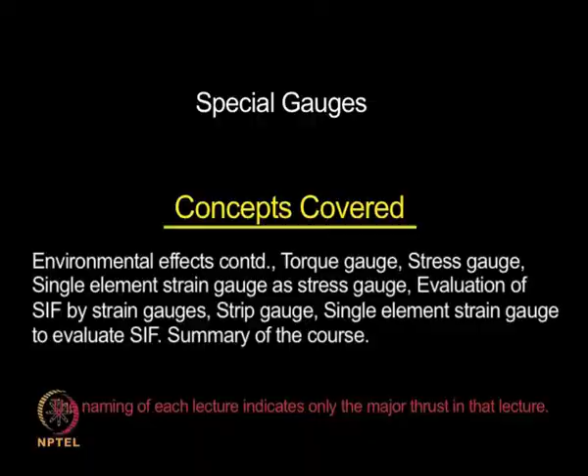We have been looking at finer aspects of strain gauge instrumentation systems. In the last class we looked at how to account for transverse sensitivity in a general case, then how to effect these corrections in the case of a T rosette, rectangular rosette, and delta rosette. Then we moved on to how to make strain measurements under hydrostatic pressure, nuclear radiation, temperature extremes, and cyclical loading, and finally we looked at environmental effects.

I said water is the elixir of life, but water is very bad for strain gauge installation. We saw that strain gauge installation needs to be protected against moisture. So, when you learn that it has to be protected against moisture...

One of the simpler approaches is to apply a thin layer of microcrystalline wax or an air drying polyurethane coating, and this is good enough for laboratory measurements where your readout time is essentially short.

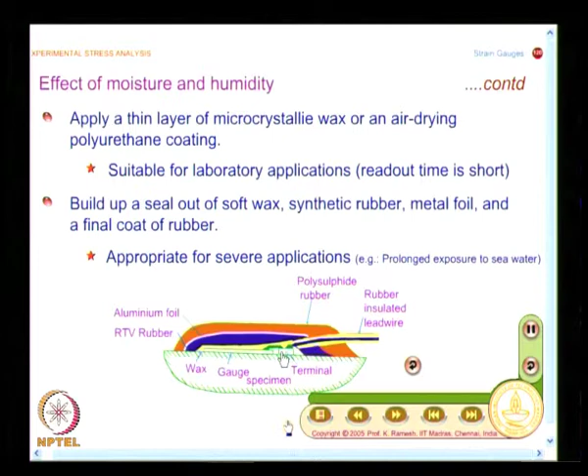I would like you to have a neat sketch of this, a figurative sketch.

So, what you essentially have is, on the specimen you have the gauge, then a coat of wax, then a coat of rubber, then aluminum foil, and a final coat of polysulfide rubber. This also you can see as an animation where you see one layer after the other.

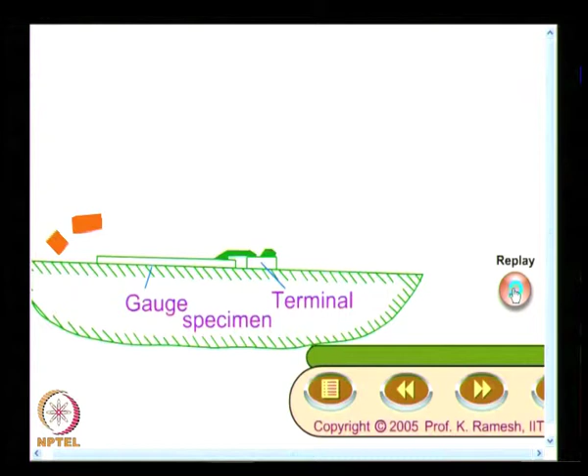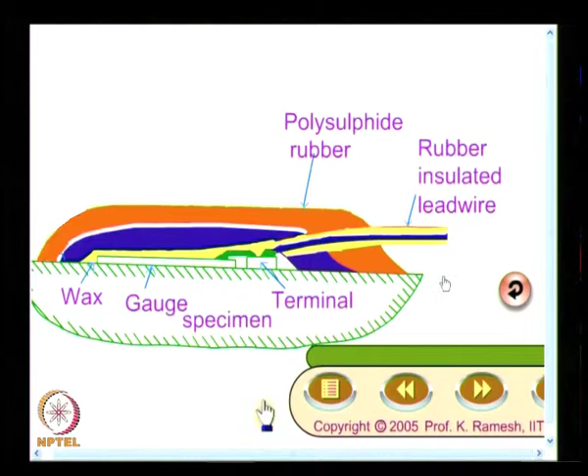Now we move on to an interesting class of special gauges. First we take up plane shear or torque gauge, and here we are going to look at a very generic arrangement. In this you have two strain gauge elements oriented at angles theta A and theta B, and you have the reference axis as x and y.

So, you have one strain gauge element measuring strain along theta equal to theta A, and another strain gauge element measuring strain along theta equal to theta B. We will develop the equation for a very generic arrangement first, then we will substitute specific values of theta A and theta B and simplify.

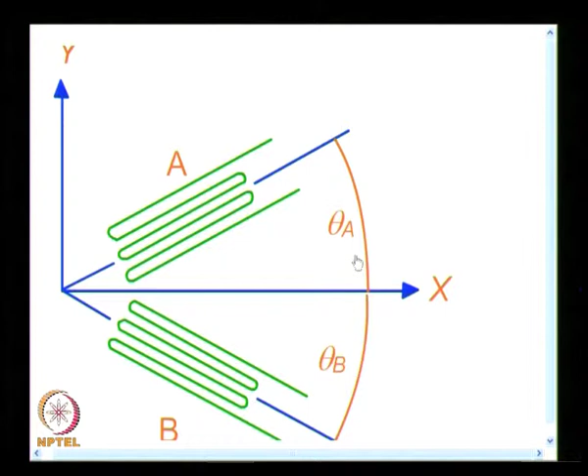In all these approaches, you need to know the strain transformation law. If you know that, analysis of strain gauge data is very simple. Here the strain transformation law is written down in terms of cos 2 theta and sin 2 theta, instead of cos square theta, sin square theta in that form.

So, when I have a strain gauge oriented at theta equal to theta a, epsilon a is given as epsilon xx plus epsilon yy divided by 2, plus epsilon xx minus epsilon yy divided by 2 into cos 2 theta a, plus gamma xy divided by sin 2 theta a.

And you simply replace theta a with theta b in the second expression. My focus is to find out the shear strain. So, from these two expressions I can solve for the shear strain gamma xy, and that is finally given as gamma xy equal to 2 into epsilon a minus epsilon b, minus epsilon xx minus epsilon yy multiplied by cos 2 theta a minus cos 2 theta b, divided by sin 2 theta a minus sin 2 theta b.

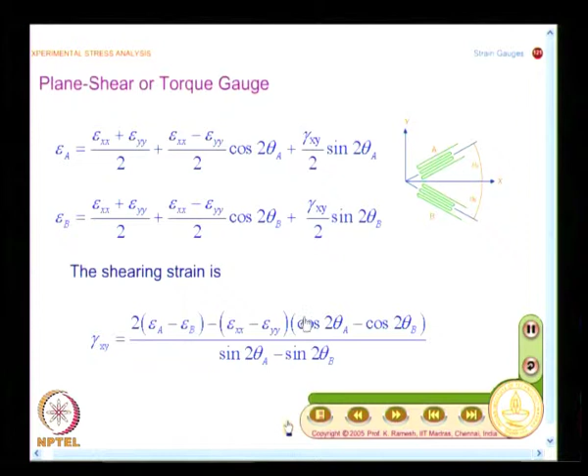What I am going to do is take the first step: make theta a equal to theta b in magnitude. If I have theta a equal to minus theta b, then cos 2 theta a minus cos 2 theta b will go to zero, so you will have only one term in the expression for gamma xy.

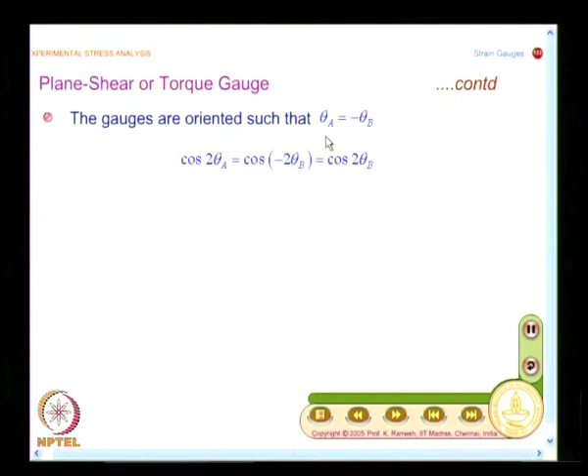So, when I have theta a equal to minus theta b, I get gamma xy as epsilon a minus epsilon b divided by sin 2 theta a.

In normal strain gauge measurements, you connect one strain gauge to a Wheatstone bridge. Only in special applications you may connect more than one strain gauge. Suppose I use a delta rosette or a rectangular rosette.

Essentially, I would connect each of the strain gauges in a rosette to separate Wheatstone bridges for strain measurement. Now here, I will connect two strain gauges which form a T rosette, and when I connect them on adjacent arms, we have already seen adjacent arms cancel each other. If the angles are oriented at theta a equal to minus theta b, then connecting two strain gauges on adjacent arms of the bridge automatically gives you epsilon a minus epsilon b.

So what you essentially get is shearing strain at the point of interest, and I can take a very special case when I keep theta a equal to 45 degrees, I get a much simpler expression.

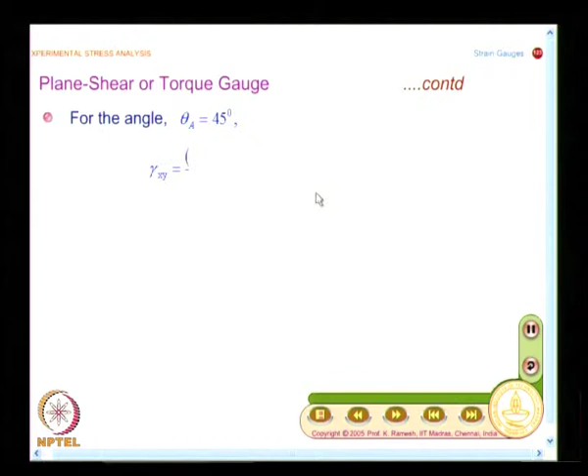That is how most of these popularly available strain gauges are oriented. So what I have is gamma xy equal to epsilon a minus epsilon b divided by 2.

So I have a T rosette and I connect the two elements of this to one Wheatstone bridge. This is a special application. Here we are not measuring state of strain at the point of interest, we are interested only in finding out shear strain, we are not interested in anything else. In such a case, you can connect elements of the rosette to appropriate arms of the Wheatstone bridge. So this is a special application, it is not a general rule.

In a generic case, you will connect each strain gauge to a Wheatstone bridge. Only in transducer application, where you design your spring element and you know the state of strain on the spring element, your focus is to measure force. In order to amplify the signal, you try to have a minimum full bridge configuration.

So you have to distinguish in strain gauge instrumentation how to connect the strain gauges and how many channels you require. You need to have a planning, and you need to bring in concepts of strength of materials, so that you place the strain gauge properly on the structure as well as connect them correctly in your Wheatstone bridge. So do not take it that in one class we saw that 2 strain gauges are connected to a Wheatstone bridge, and I will do that for every other application.

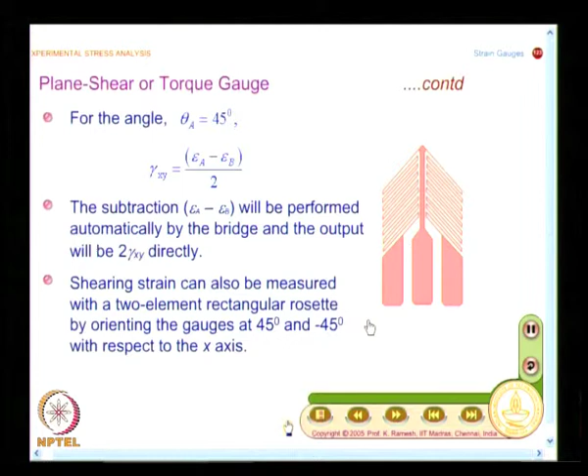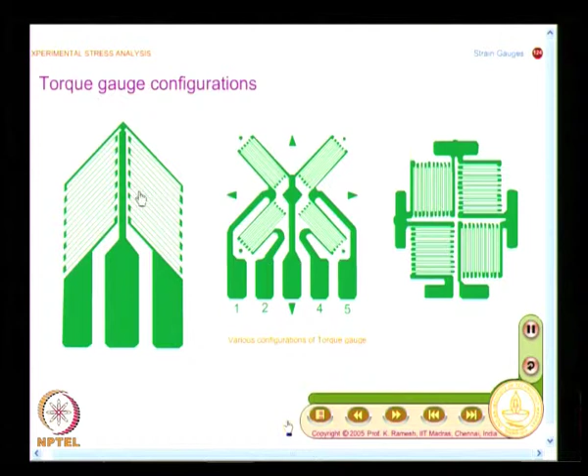And you also have different configurations of this available. Instead of just 2 strain gauges, you have 4 strain gauges which are oriented at 45, minus 45 and 135 and so on. So here you will get 4 times the signal, and these are all special gauges which can be used to measure the value of torque. If you calibrate it properly, you can also measure the torque that is applied to the structure. So in these applications you will connect all these strain gauges appropriately in a single Wheatstone bridge.

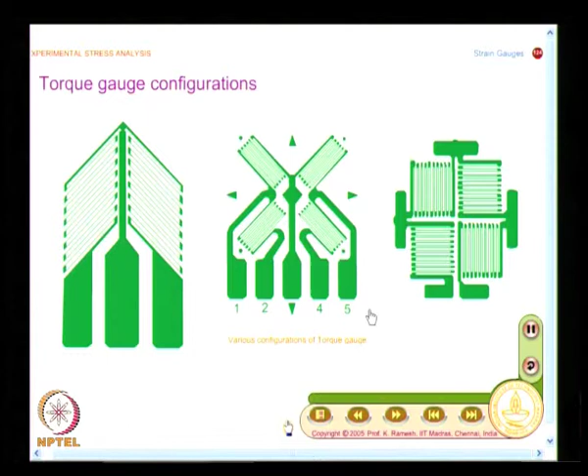We have seen how to measure shear strain. People also asked a question: in basic stress analysis, we are only looking at evaluation of stress components, so why not we also design a stress gauge instead of a strain gauge? So the focus is, whatever measurement I get should be proportional to stress, then it becomes a stress gauge.

We have looked at transverse sensitivity effects as a nuisance, and I said what you consider as nuisance in one application can become beneficial in another application. That is the case with friction. Without friction you cannot walk on the street, and you need to minimize as much friction as possible in many of your rotating components. And if you do not have friction, you cannot apply brakes. So friction is advantageous as well as disadvantageous.

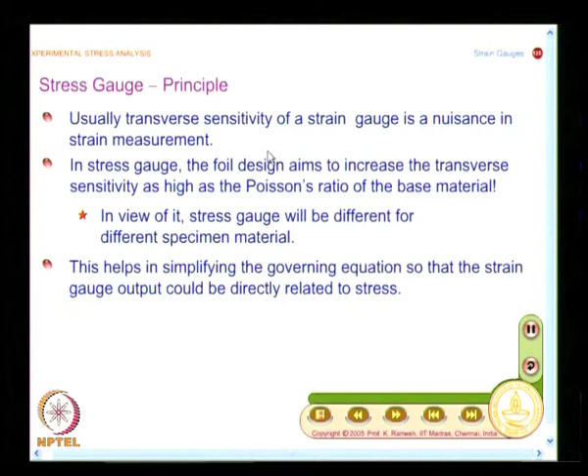On a similar vein, we will see in the design of the stress gauge how we play with the transverse sensitivity. In fact, we would like to have maximum transverse sensitivity, so that a given strain gauge functions like a stress gauge. So that is what is mentioned here: transverse sensitivity of a strain gauge is a nuisance in strain measurement. In stress gauge, the foil design aims to increase the transverse sensitivity as high as the Poisson's ratio of the base material.

So what happens? In view of this, stress gauge will be different for different specimen materials. That we have already accepted in strain gauge technology. We have looked at self temperature compensated gauges, and all these self temperature compensated gauges are meant for a particular specimen material. So we are accustomed to this kind of a scenario in strain gauge technology, and you extend a similar argument for the development of these special gauges too.

I have given the result in advance, but we will see how the result is arrived at. So, let us look at the expression for delta R by R, what we looked at earlier.

We will recall here, that is given as S A into epsilon A plus K T into epsilon T. We have not written it in terms of S G, we have written the generic expression here.

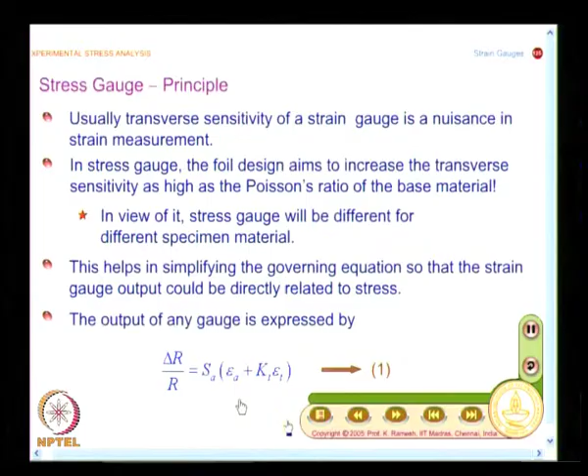And now we are essentially trying to find out the state of strain or state of stress on a free surface, and we consider that as a plane stress situation. So, I can replace the strain quantities in terms of stress components by invoking stress strain relations. That is what I am going to do.

So, when you look at the relationship, I have epsilon A equal to 1 by E into sigma A minus nu times sigma t, and epsilon t is given as 1 by Young's modulus E into sigma t minus nu times sigma A. When I substitute in the previous equation, I get delta R by R equal to sigma A into S A divided by Young's modulus into 1 minus nu K t, plus sigma t S A divided by Young's modulus E into K t minus nu.

So, delta R by R is a function of axial stress as well as transverse stress. Suppose I make K t equal to nu, this term vanishes.

So, what you are really looking at is, in a strain measurement system, I essentially measure change in resistance. Now, we have looked at delta R by R could be related to axial stress, provided the gauge configuration has a transverse sensitivity of a very high value equal to the Poisson's ratio.

So, look at this diagram very carefully, and there is a subtle difference between what we saw as a torque gauge and what we say as a configuration for the stress gauge. Here also I have two elements oriented at plus theta and minus theta, but the subtle difference is these two elements are joined, they are not independent elements.

So, I have one strain gauge which is made in a fashion having two elements which are joined. So, the whole thing is one strain gauge. So, I will have one tab here, I will have another tab here. This has to be connected to the Wheatstone bridge.

And I have also cautioned earlier, you must develop a familiarity by looking at a pattern what this gauge stands for. In fact, you will also be tested whether you have been able to identify strain gauge patterns of various types, that will be tested in your examination.

And you should not get confused between a T rosette or two element strain gauge or a stress gauge. There is a subtle difference, the subtle difference you should understand. The elements are joined here, and this is how you have made a stress gauge.

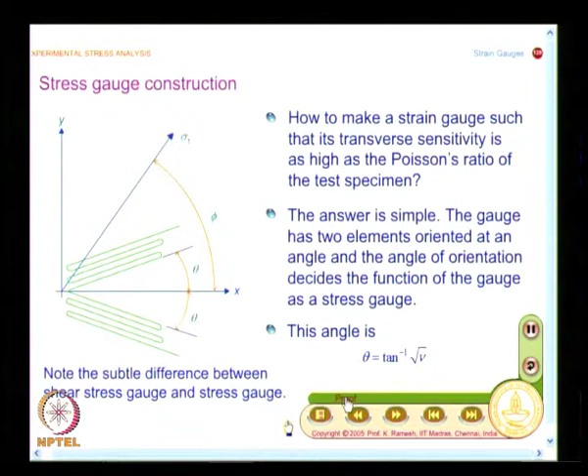And when I do the mathematical development, I will refer these two angles with respect to the principal stress as the reference. So, I will have one as phi minus theta, other one as phi plus theta, and again you have to go back and look at the strain transformation law. That is what I am going to do. These equations are not difficult, these equations you already know, only aspect is we are applying it for a different strain gauge configuration.

I have two elements joined together, so I'll look at epsilon phi minus theta plus epsilon phi plus theta. Since I've taken the principal stress axis as reference, I write epsilon phi minus theta as 1 by 2 times epsilon 1 plus epsilon 2, plus 1 by 2 times epsilon 1 minus epsilon 2, multiplied by cos 2 phi minus theta. This is like a normal strain gauge sensitive to strain along the gauge length. Similarly, another gauge measures strain along its length, denoted epsilon phi plus theta, where theta changes from minus theta to plus theta.

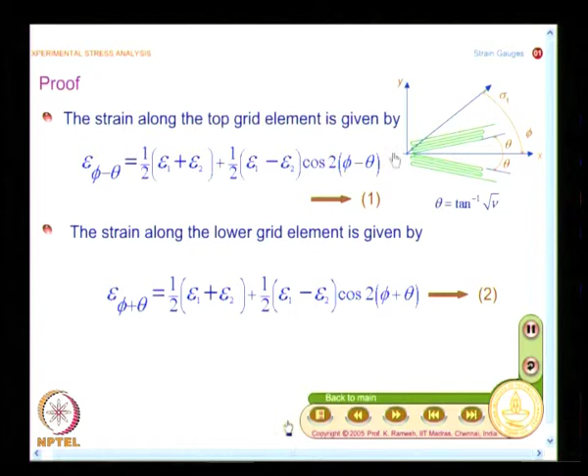So we will develop a complicated gauge pattern to start with. In an unknown situation you would do this, but you will also find out whether a simple normal strain gauge could be used for stress measurement.

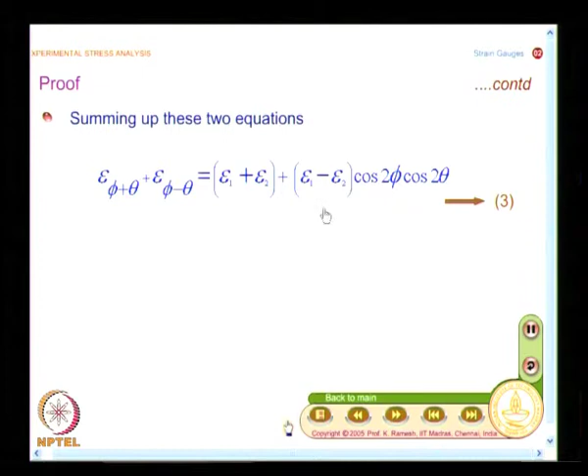When I add these two strain quantities, I get epsilon 1 plus epsilon 2 plus epsilon 1 minus epsilon 2 multiplied by cos 2 phi into cos 2 theta. I will further simplify this, since my focus is to get the sum of these two strains proportional to a single stress component. We will not evaluate the angle theta directly, but set theta equal to a specific value and simplify the expression. We will take theta equal to tan inverse root of nu, and we will prove this by induction.

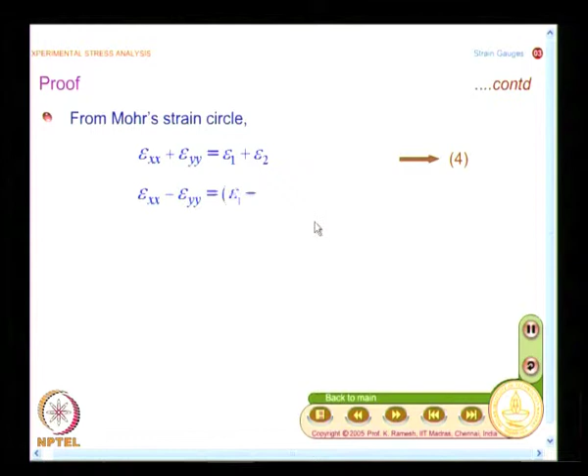We also know from Mohr's strain circle that epsilon xx plus epsilon yy equals epsilon 1 plus epsilon 2, and epsilon xx minus epsilon yy equals epsilon 1 minus epsilon 2 into cos 2 phi into cos 2 theta. We will replace these in terms of epsilon xx and epsilon yy.

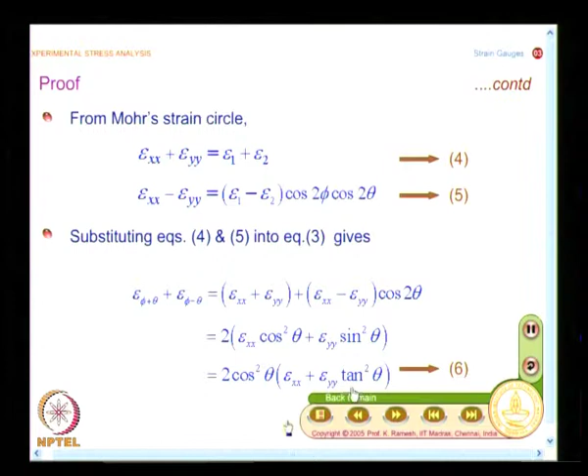Substituting these into the earlier equation, I get epsilon phi plus theta plus epsilon phi minus theta equals epsilon xx plus epsilon yy plus epsilon xx minus epsilon yy times cos 2 theta, which simplifies to 2 cos squared theta times epsilon xx plus epsilon yy tan squared theta. We have simplified the expressions the way we want. The focus now is to find for what values of theta this expression gets simplified.

We start with the premise that if the gauge is manufactured so that theta equals tan inverse root of nu, then tan squared theta equals nu and cos squared theta equals 1 by 1 plus nu. This simplifies epsilon phi minus theta plus epsilon phi plus theta to equal 2 by 1 plus nu times epsilon xx plus nu times epsilon yy.

I get an expression for sigma xx as Young's modulus E divided by 1 minus nu squared, multiplied by epsilon xx plus nu times epsilon yy. So I finally get sigma xx related to epsilon phi minus theta plus epsilon phi plus theta through the factor E by 2 into 1 minus nu.

What we have seen is that with two elements joined together, connected in one arm of the Wheatstone bridge, I measure essentially the sum of these strains. Now I have an expression to find the normal stress sigma xx directly from strain measurement, so I call it a stress gauge, with only the multiplication factor to be reset in the instrumentation system. If you design a foil with two elements like this, the measurement allows you to find the normal stress component along the bisector.

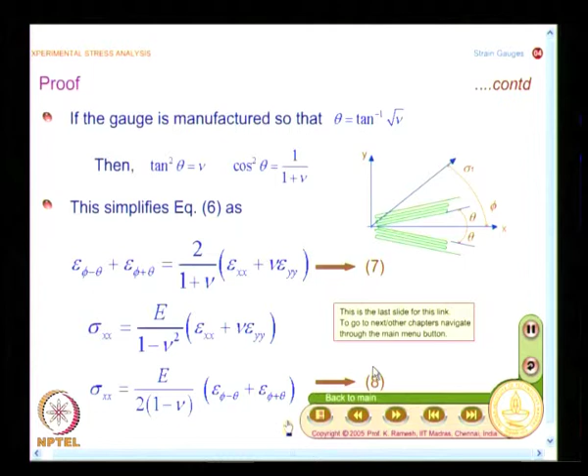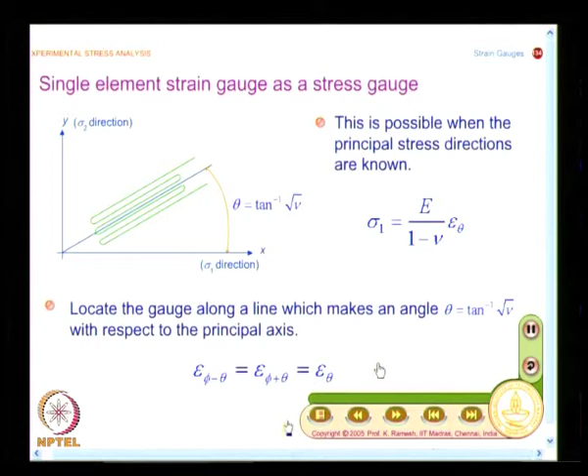See, in all this, these are all gimmicks - once you have understood something, you orient it at a particular angle and you get the result you want. For this, I need to know the principal stress direction. Without knowing the principal stress direction, I cannot use a single element strain gauge to measure stress.

There are certain applications where you can minimize the number of channels by just pasting one strain gauge appropriately, and if your design demands a stress quantity along a particular direction, then your job is done. So the prerequisite is I need to know the sigma 1 direction, and I will have to align a simple normal strain gauge at theta, where theta is given as tan inverse root of nu.

And we have already noted, when phi equals 0, epsilon phi minus theta equals epsilon phi plus theta, which equals epsilon theta. So your final expression reduces to sigma 1 equals E by 1 minus nu, times epsilon theta.

So the trick we have done is a normal strain gauge can be used as a stress gauge, but it can measure only when it is aligned with respect to one of the principal stress directions, and the angle at which you have to align is also specified. You do not have to make a gauge which is dependent on the specimen material. Here I have to align it appropriately for different specimen materials, that is all I have to do.

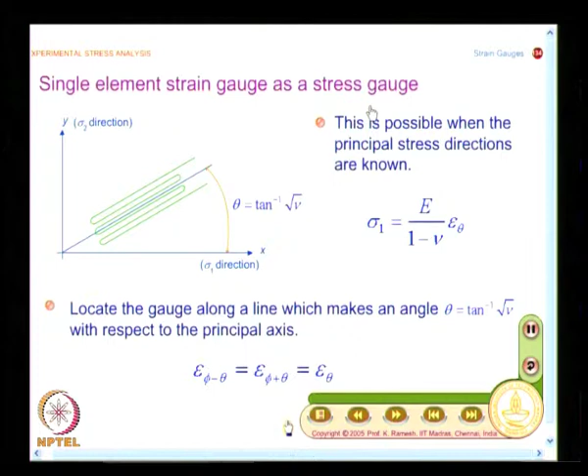So now you have a via media. If somebody asks you why are you doing only strain gauge, you can also go back and say, no, I can also use and develop a stress gauge. This is one of the very common questions - in interviews people can ask, do you know what is a stress gauge? You should not see stars, you should say that there is a way to do it, and these are all recent developments.

People played with metal foil where you have to etch. If they had to live with the wire, probably they would not have proceeded in this direction, because you have the facility to etch any pattern of your desire. Whatever the design you have, you are in a position to explore and find innovative methods to improve your measurement.

And what we have done here, if you look at the stress gauge, we have selected a particular parameter so that one of the terms becomes zero. You have this idea borrowed even in fracture mechanics. My next focus is to find out how to get the stress intensity factor using strain gauge technology.

First we will see a very elaborate method, then we will simplify it. In order to simplify, we have to knock off terms - we have to knock out two terms in a series. So I will have to work with theta as well as alpha. In this case we have to knock out only one term, so we decided we will align it at angle theta.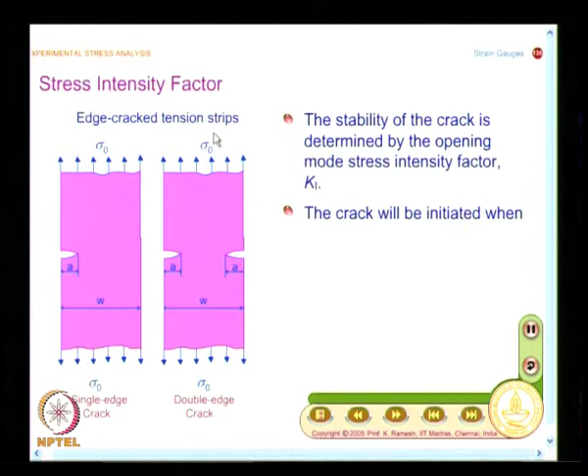What is a stress intensity factor? Essentially, the stress field in the vicinity of the crack is possible to write in terms of the stress intensity factor, and you may have multiple cracks in a system. The crack that is critical is going to propagate, and fracture mechanics says that when K1 is greater than the fracture toughness, K1C, the crack will be initiated.

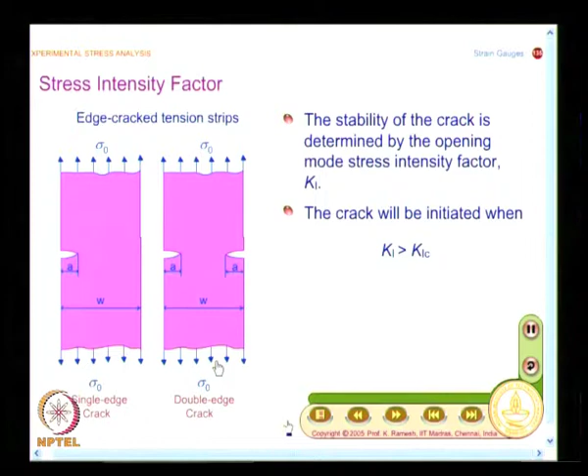So the focus is, for a given structure you need to find out what is the stress intensity factor. Here we are essentially looking at a simple mode 1 situation. So the idea is, there are occasions where you need to experimentally find out what the stress intensity factor is.

There are many methods, you can do it by numerical methods, method of caustics, method of photoelasticity, method of Moire, holography, and we will learn how strain gauge technology could be used. So what do I need to do?

I need to look at the strain field here, and what is the strain field in the vicinity of a crack? You just look at this expression, you need not copy it down now, you can copy a simpler form later. What you have here is the expression for epsilon xx, epsilon yy, and gamma xy. You need to look at 3 coefficients, a naught, b naught, and a1, and if you closely look, it is the first term which is related to the stress intensity factor.

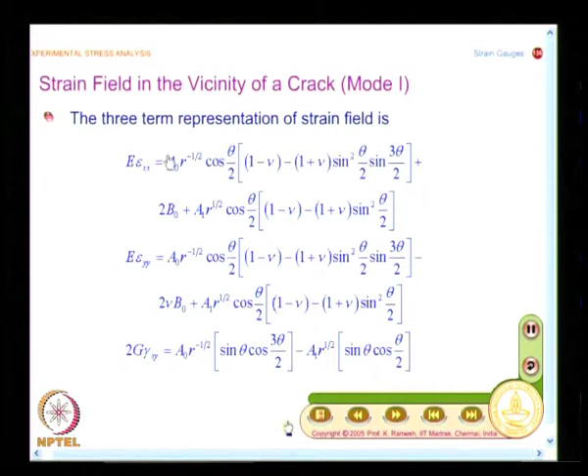Now I am going to paste a strain gauge at an arbitrary angle, so I need to find out for an arbitrary angle what is the expression for strain. If I know the expression for epsilon xx, epsilon yy, and gamma xy, I can write down the strain expression along any axis of interest. That is not a difficult aspect.

Essentially you have to look at the strain field, and in order to have reasonable accuracy I am taking a 3 term solution. I can write infinite terms, but those will not be in a position to evaluate, and you should also not stop at only the first term. In order to enhance accuracy we want to take as many terms as possible, but the methodology should be simple enough to measure. So my focus is to bring in 3 terms, but knock off 2 terms intelligently by selecting appropriate angles. That is what I am going to do.

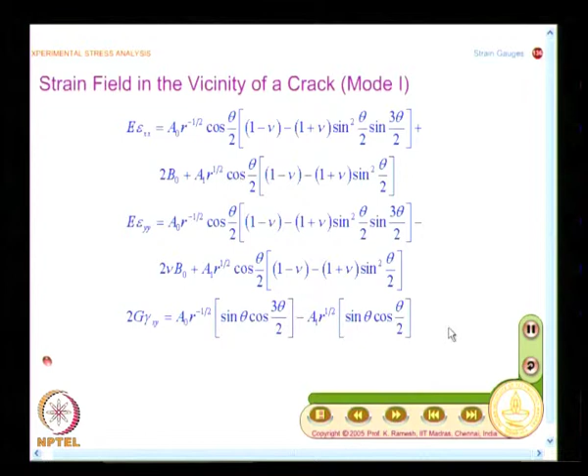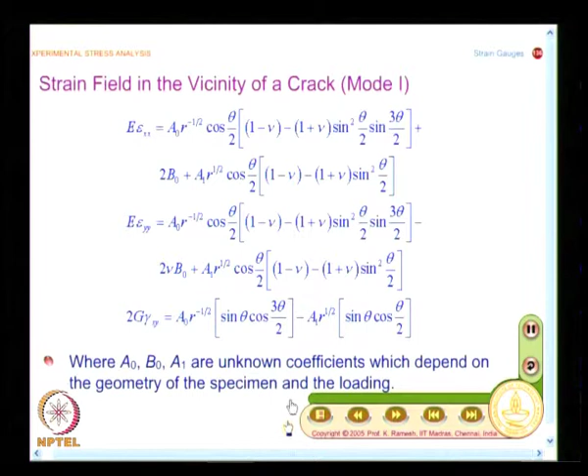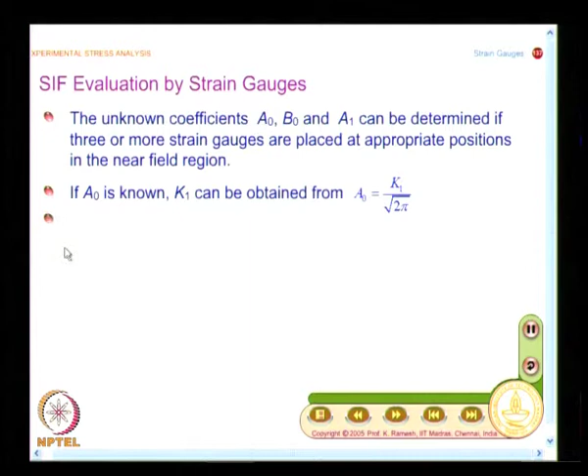This is what is summarized here. You have A naught, B naught, A1 as unknown coefficients which depend on the geometry of the specimen and the loading, and we will knock off other terms leaving only A naught. If A naught is known, K1 can be obtained from A naught equal to K1 by root of 2 pi.

This is what I am going to aim at. If you are confronted with a situation like fracture mechanics, you would like to measure at several points in the vicinity of the crack tip, find out strain quantities, and in such a case normally you have to paste strain gauges at different locations, and their alignment becomes difficult.

But the advantage is you are able to get strain at short distances very comfortably. I can essentially get the strain field, and in fact people have developed methodologies using strip gauges, find out the strain field, and solve this in an over-deterministic fashion using the principle of least squares, evaluating several terms in the series and finally evaluating only the stress intensity factor.

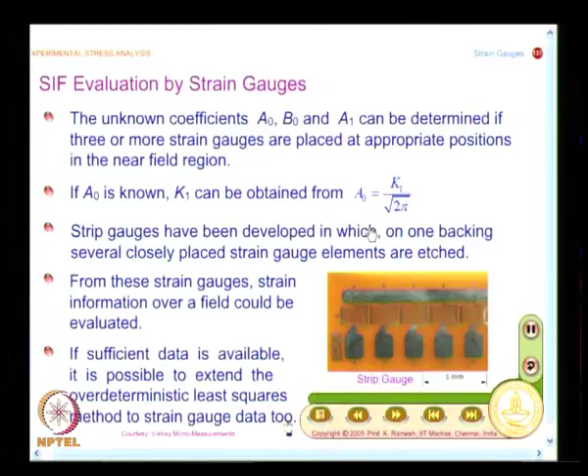So you could satisfy the strain field information by pasting several strip gauges in the near vicinity, but the very thought is so difficult, because it is available as one backing. Pasting may be simpler, but soldering is going to be a very tricky issue. That is where you will find that whole field techniques are better.

When you have to get field information, whole field techniques are a lot better, but you also need a via media. When I use a strain gauge, is it possible to get the strain field? In principle it is possible, but you have to take a lot of effort to do that. This is where researchers have stepped in, played with the equations, and found a very simple approach where a common general purpose single strain gauge could be used to find out the value of K. How elegant it is, we will have a look at it.

The idea here is the number of strain gauges required for the determination of K1 can be reduced to 1 by appropriate choice of strain gauge location and its orientation. My interest is to knock off B naught and A1 terms, so I look for 2 orientations.

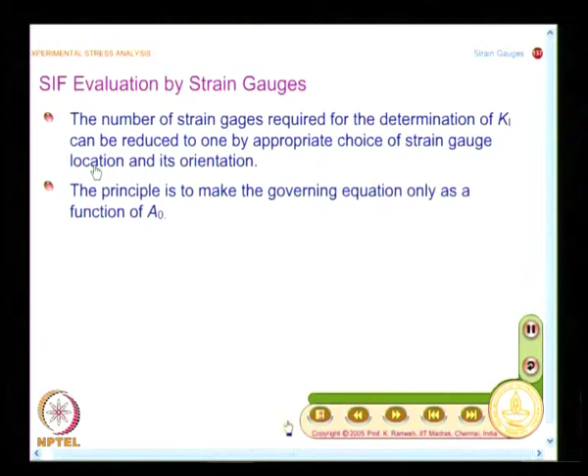You are trying to find out strain along a particular location which is at an angular location, and at that location you measure strain along a particular orientation. So I have two parameters to play with, and I can have the governing equation only as a function of A naught. People have done this as research, and we have the result readily available.

We are going to discuss it in about 10 minutes, we will find out what a researcher has done in 6 months or almost a year to arrive at implementation of this idea. The idea is I should have the governing equation only as a function of A naught.

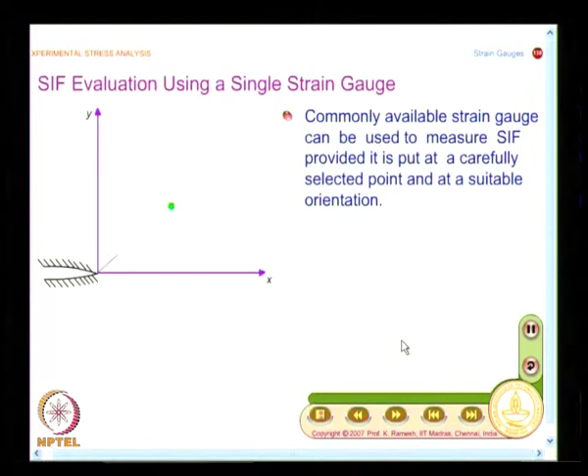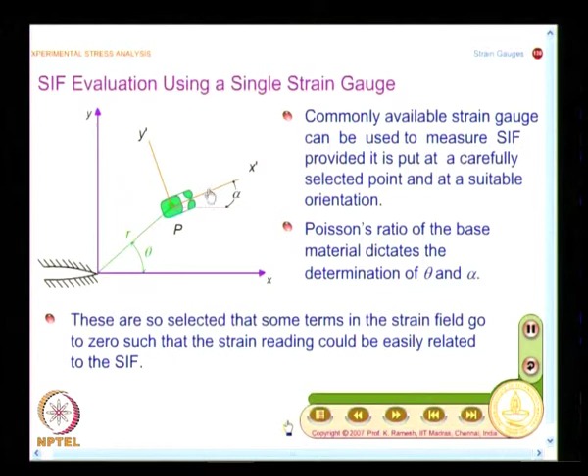Look at the animation carefully. What I am going to do is use the common strain gauge. I will have the orientation theta, but at orientation theta I will have the strain gauge aligned at angle alpha. So for this value only I would find the strain along this direction, and now the question is how to select theta and alpha. That is what we will look at.

Make a neat sketch of this diagram that illustrates how to use a single strain gauge for stress intensity factor measurement. I have this as the crack tip, taken as the origin, and you locate the point P which is at an angle theta from the crack axis. At point P you measure strain along the direction alpha, that is very important.

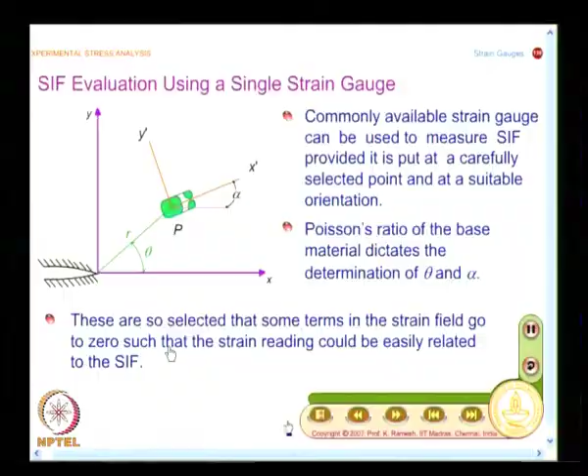I have already given you the clue: we have the Poisson's ratio of the base material which was used in designing the strain gauge. We will extrapolate those ideas and use the Poisson's ratio of the base material to find appropriate values of theta and alpha, so that some terms in the strain field go to 0. So you have to evaluate theta and alpha intelligently to knock off the terms containing B naught and A1.

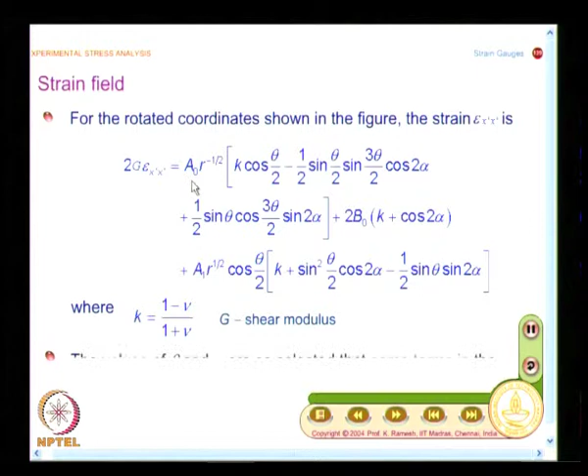So I will have an expression only in terms of A naught, then I can find the stress intensity factor from that. For this I need to know the strain along any arbitrary direction. This expression you can write down: 2g into epsilon x prime equals A naught r power minus 1 by 2 multiplied by kappa cos theta by 2 minus 1 by 2 sin theta by 2 sin 3 theta by 2 into cos 2 alpha, plus 1 by 2 sin theta cos 3 theta by 2 sin 2 alpha, plus 2 B naught k plus cos 2 alpha.

Now you have a clue how to find alpha. This should be minus kappa; if I have this as minus kappa, then this term will go to 0. So find alpha and then find theta, that is how you play with the equations. Then I have this as plus A1 r power 1 by 2 into cos theta by 2 kappa plus sin square theta by 2 cos 2 alpha minus 1 by 2 sin theta sin 2 alpha.

Once you look at the expression for the strain, for the strain gauge which we have pasted, we have it in terms of theta and alpha, and you get a clue how to get the values of alpha as well as theta. Kappa is given as 1 minus nu divided by 1 plus nu, and g is the shear modulus.

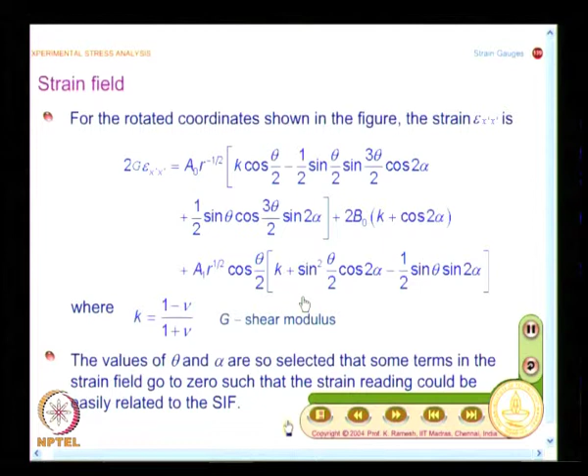Whatever development you have done in strain gauge, playing with the Poisson's ratio and orienting the strain gauge appropriately, that kind of approach is extrapolated in the measurement of stress intensity factor also. Once you strike an idea, you also find out whether this idea can work in other situations.

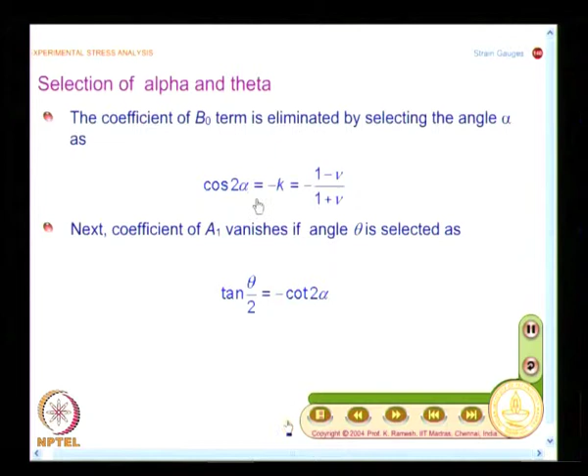Now I have an expression, I can go and find the expression for alpha and theta. We have cos 2 alpha equal to minus kappa, so that is minus of 1 minus nu divided by 1 plus nu. I can find the value of alpha, and if you look at the expression for A1, that vanishes if angle theta is selected such that tan theta by 2 equals minus cot 2 alpha.

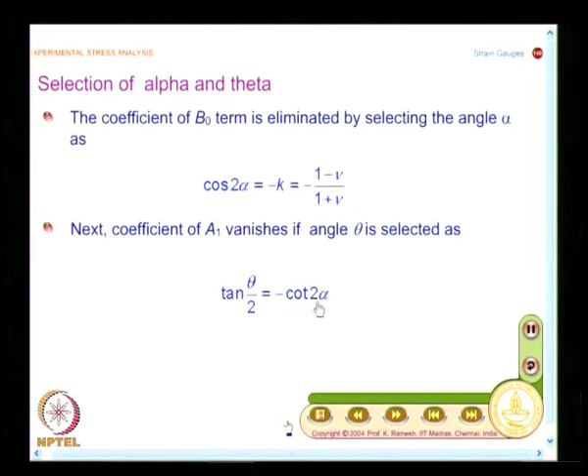You have the strain expression, and when you substitute these values of alpha and theta, you will find it is only a function of A naught; the terms containing B naught and A1 are cleverly knocked off.

So, you play with the angles and you are able to do it. These are all finer aspects of strain gauge instrumentation. When you normally place a strain gauge, you are only measuring strain along a particular direction. Whatever strain you measure is intelligently related to the stress intensity factor by your understanding of the strain field expression.

And if alpha and theta come out as 22.32 degrees and 32.5 degrees, nobody will use it. People find this useful mainly because the most popular aerospace material is aluminum. For aluminum, both angles reduce to 60 degrees, which makes your life very, very simple. So, that is what we will see now.

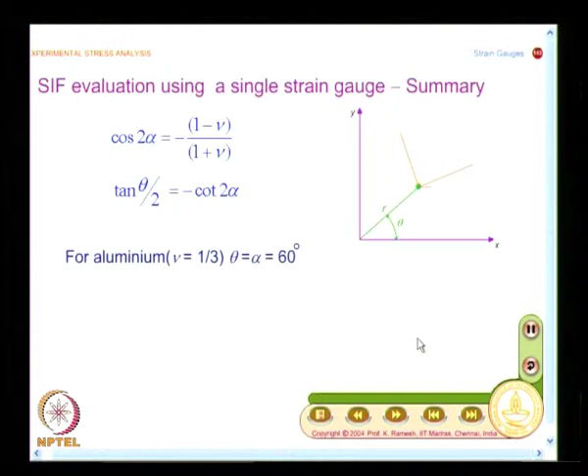When I have aluminum, nu equals 1 by 3, and theta and alpha go to 60 degrees. The angle is very important. If the angle were not possible to achieve, this technique would not have taken off. Aluminum is used in space structures, and all aerospace structures are where maximum experimentation is done, because safety is a very important aspect. And fortunately, the values of theta and alpha are as simple as 60 degrees.

This is a generic arrangement. You have to look at theta as well as alpha in a generic situation, and the final expression is also available. So, what I have here is k1 equal to Young's modulus E into root of 8 by 3 pi r, times epsilon g.

So, epsilon is the strain along the particular direction. For the case of aluminum, this is measured for theta as well as alpha equal to 60 degrees. For steel, you will have to find theta and alpha, because knowing the Poisson's ratio, you can find what theta and alpha are. So, if you orient this, you have an expression for the stress intensity factor.

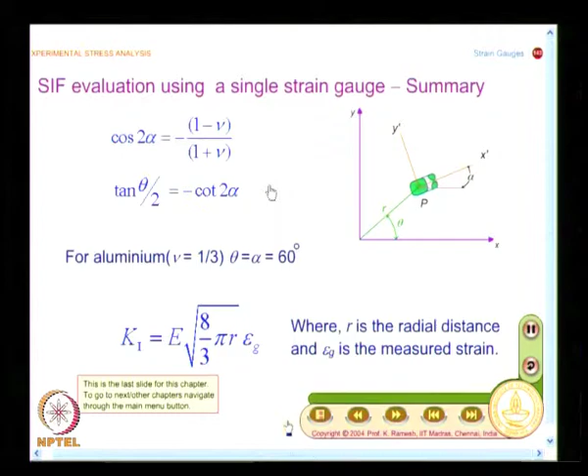So, with this we come to the close of this course, and we will have a brief overview of what we have been discussing in various chapters. We started with transmission photoelasticity.

The key concept was that when you have a model that is loaded, it behaves like a crystal. When the loads are removed, it behaves like a normal material. A crystal exhibits a property of birefringence, and this is exploited in photoelasticity, where you are able to view fringe patterns in different optical arrangements.

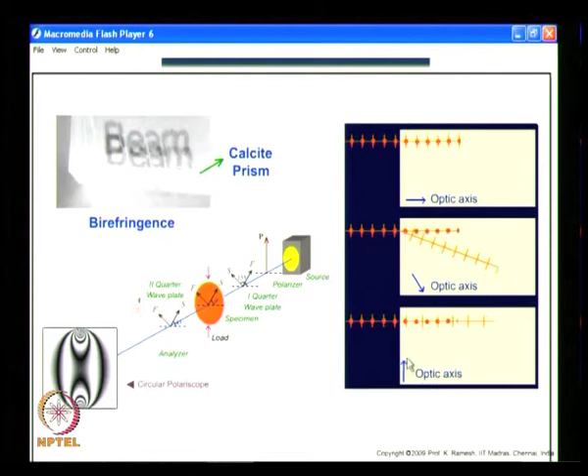Here you have a circular polariscope, with both a dark field and a bright field possible. We also discussed how the incident light should be oriented with respect to the optic axis of the crystal. When it is perpendicular, it is useful in photoelasticity, and an incident ray produces two refracted rays that travel with different velocities.

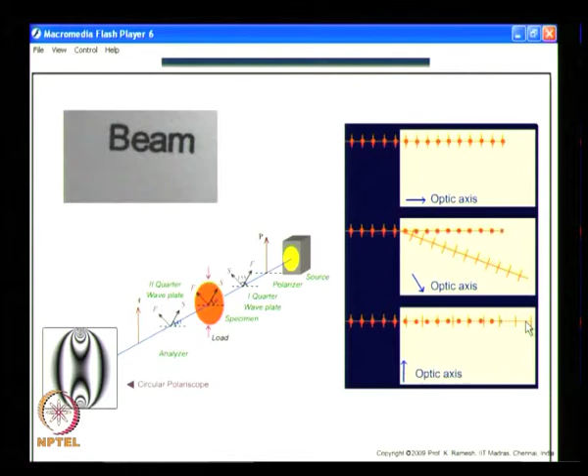So, that is the basic physics in transmission photoelasticity, and we said we also need to have methodologies to analyze prototypes. That was discussed in photoelastic coatings, and I said all the coating techniques share a commonality. We have photoelastic coatings, we have brittle coating, and to an extent you can also think of strain gauge as a coating applied on the material, and one of the key concepts here is the strain in the prototype is faithfully transferred to the coating.

And in the case of photoelastic coating, you have thickness of the order of 3 millimeter pasted. So, you need to necessarily have what are known as correction factors.

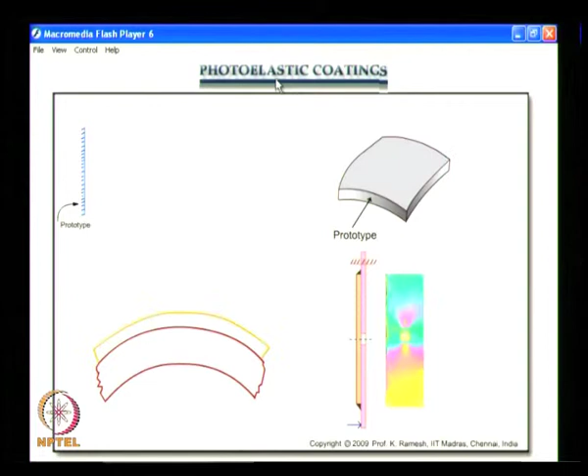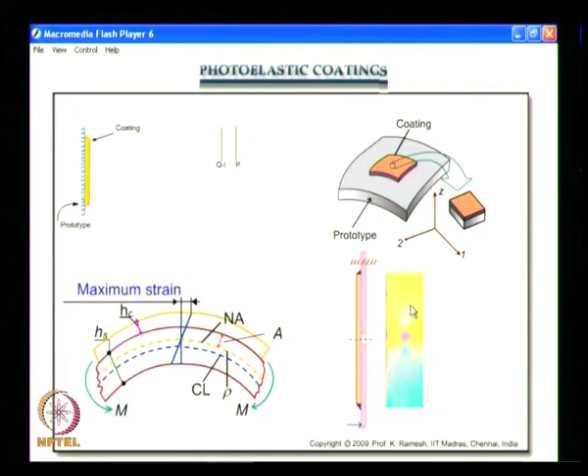Not only this, being an industry friendly technique, I have also mentioned that engineering is approximation, and approximation starts right at the data collection stage in reflection photoelasticity. You do not have a normal incidence, you have only an oblique incidence, and you want to minimize this angle of oblique. So, you keep the polariscope at least 2 to 3 meters away from the specimen, and you see rich fringe patterns, and these are possible to interpret for stress information.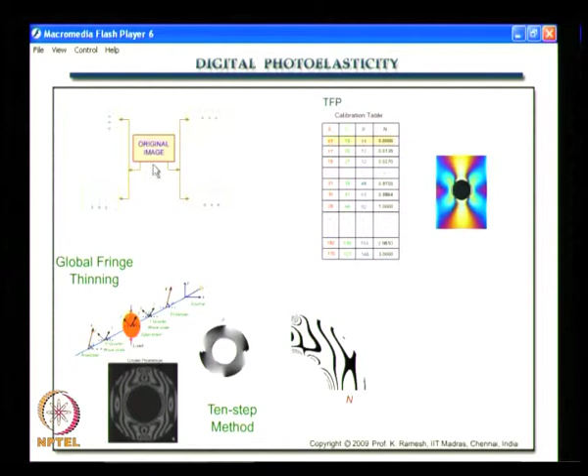Then we moved on to another aspect of photoelasticity, which is becoming very popular these days, known as digital photoelasticity. In the initial stages, they had developed algorithms to thin the fringes, which is what you have as a global fringe thinning algorithm. So, it employed scans at 0 degree, 45 degree, 90 degree and 135 degree, and logical operators were used to get the skeleton free of noise.

Then I said that you also have extension of color code for quantitative measurement in digital photoelasticity, which is called 3 fringe photoelasticity, where you are able to find out the R, G and B values and find out the fringe order at the point of interest.

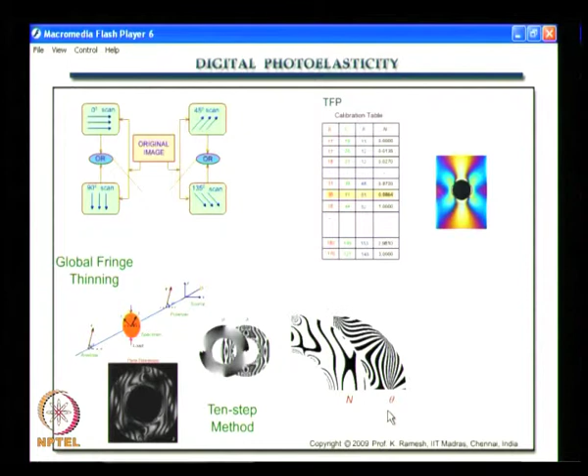And when you want to do whole field analysis, what is possible now is the employment of what is known as the 10-step method, which assures you high quality isoclinic data as well as isochromatic data, and this high accurate values are needed for stress separation studies. We have not looked at in detail how to separate the stresses, but if you know n and theta, you have methodologies available to get sigma x, sigma y as well as tau xy.

So, what you have here is the modern methodologies not only stop at finding out n and theta accurately at every point in the domain, you can also post process them and even go to the extent of separating out the stresses.

And what we have found is, among various phase shifting techniques, the 10-step method is found to be robust, and a commercial polariscope could be used to record 10 images. The normal misalignments do not have much influence in the 10-step method.

Then we looked at the method of strain gauges, and I said a strain gauge measures strain along the gauge length, it is only measuring a component of strain. And for measuring the change in resistance, the popular instrumentation is the Wheatstone bridge.

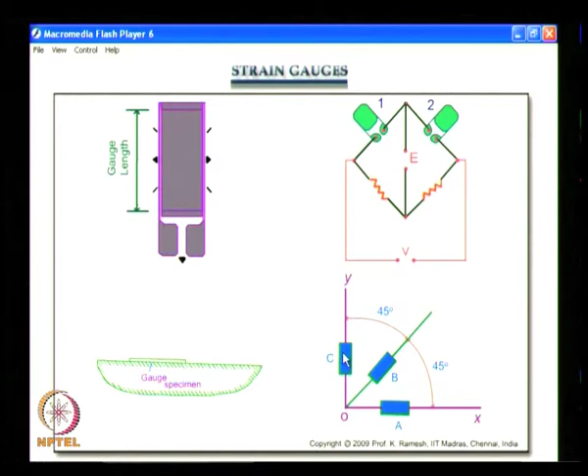And if you have to measure state of strain at a point, you need 3 strain gauges, they are pre-aligned, available in one carrier known as a rosette. And we discussed various finer aspects of strain gauge instrumentation, and we also finally looked at moisture, which is very bad and this needs to be protected.

So, you have a multiple layer formed with a layer of wax, then layer of rubber, then aluminum foil, and finally another layer of rubber.

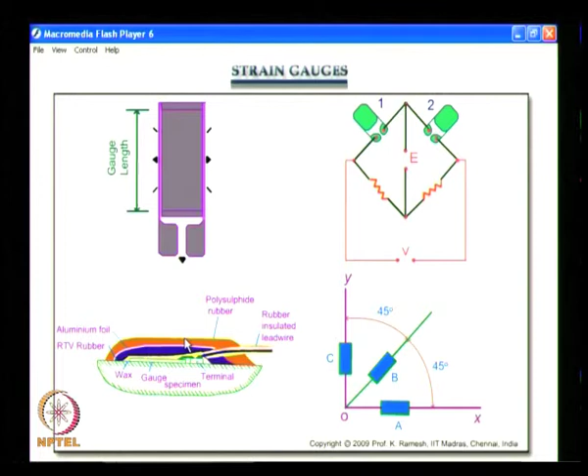And I said for any one of this strain gauge instrumentation, strain gauge selection and installation is very, very crucial. We saw that a variety of patterns exist, and there is a very elaborate kit available, and there is a procedure for how to apply the bonding.

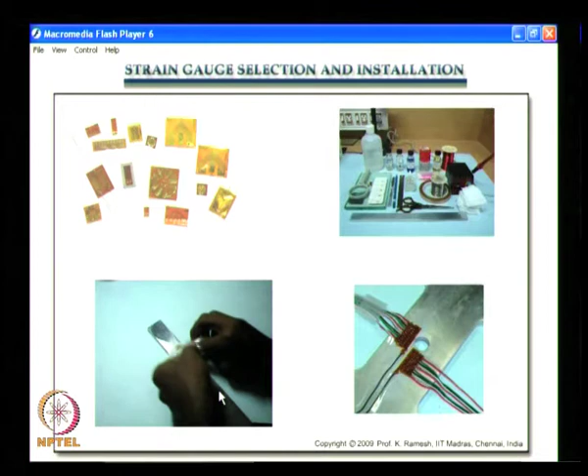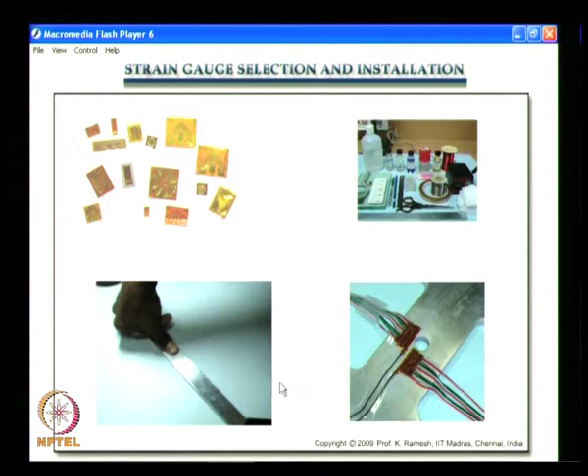A simple cyanoacrylate cement gets cured by thumb pressure, that is what is illustrated here, and you press it with a gauze sponge and put it with thumb pressure, and after about 2 minutes the bonding is completed, and this shows use of strip gauges. And finally, we come and see what we learnt in the first slide.

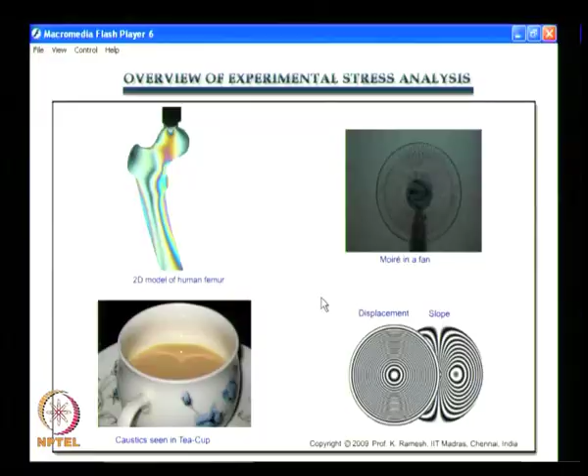The focus is, I can get stress information, I can get displacement, slope as well as curvature when I say what is stress analysis. And what this slide shows is, for every experimental technique there is a physics behind it, and this physics needs to be understood for you to interpret the results. So, that is the focus.

So, I see a caustic cusp here, and I see a beautiful play of moire in the case of a fan. So, you need to have physics understanding of experimental methods.

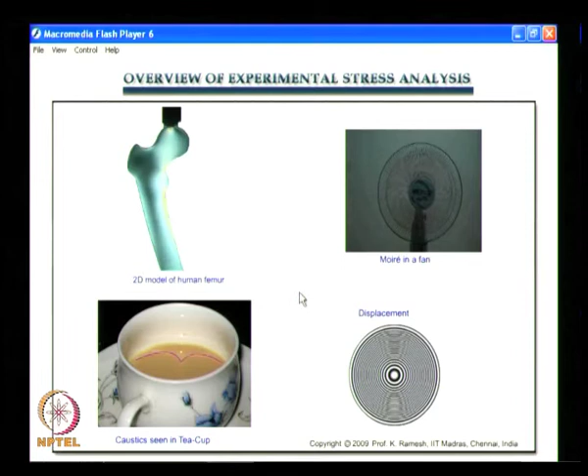Whenever they come across any new physical phenomena, they try to develop a new experimental technique. Thank you.